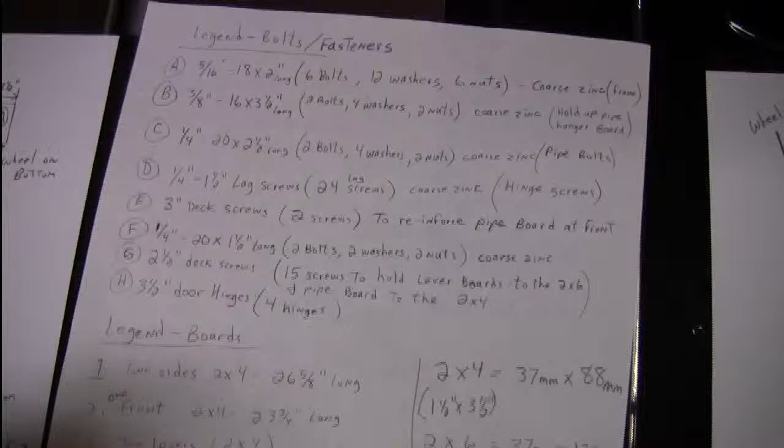I covered all these diagrams a little bit in the last video, but basically this is the side diagram. Here are the bolts, and I believe that's visible for the bolts. You can pause this or the other video if you want to look back.

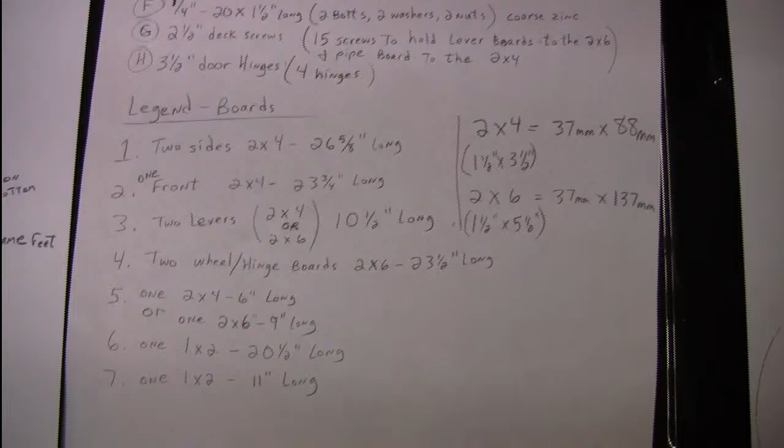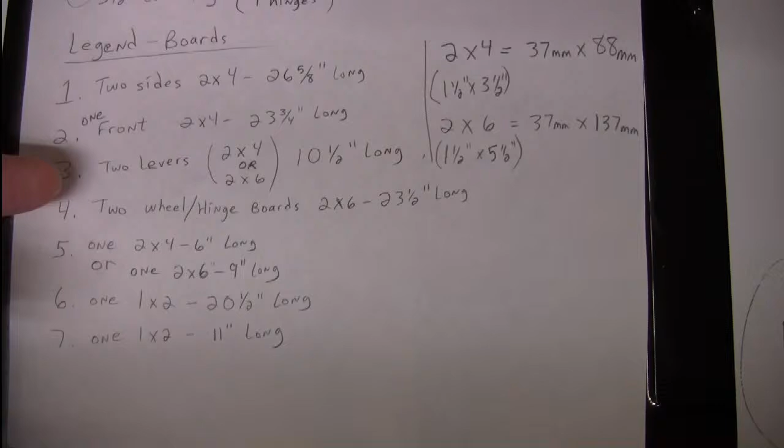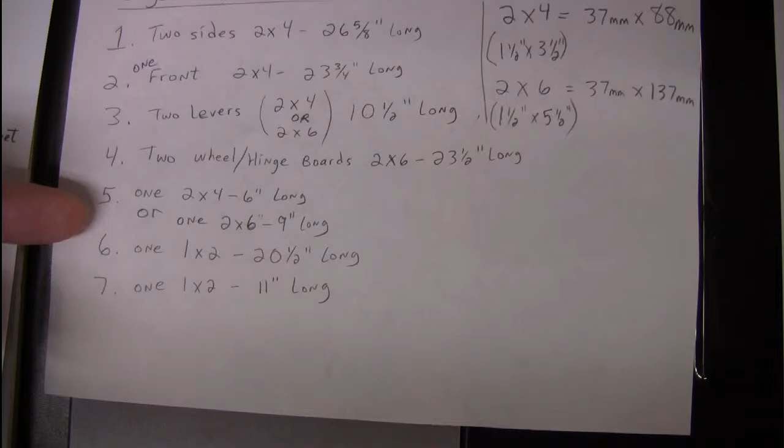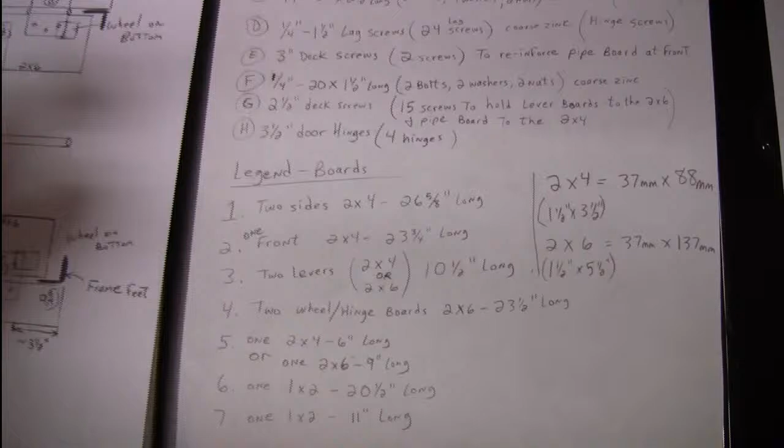So we have the two side pieces, the front piece, the two levers, again 2x4 or 2x6, the two hinge boards used for the wheels, and number 5 is the front piece where the pipe goes through. 6 is a piece of hardwood that goes across the entire center line to hold the back of the pipe, and 7 is the piece of board on top that the ropes are connected to that pulls down.

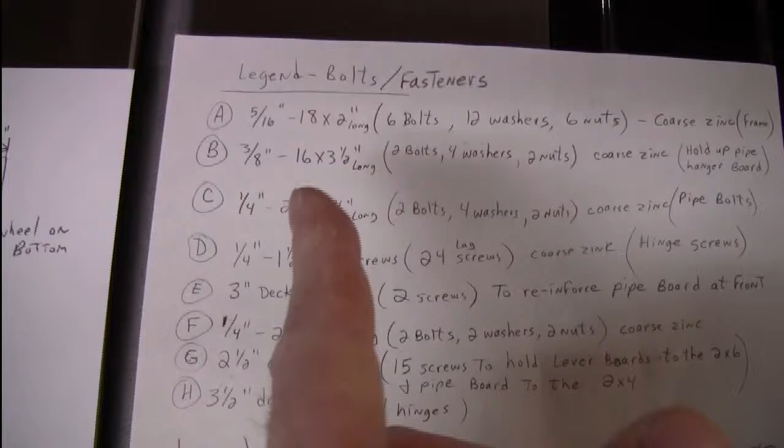So what I tried to do was, I probably should have explained this in the other video, but maybe I'll do this one first, I'm not sure. So this will be one of the two videos.

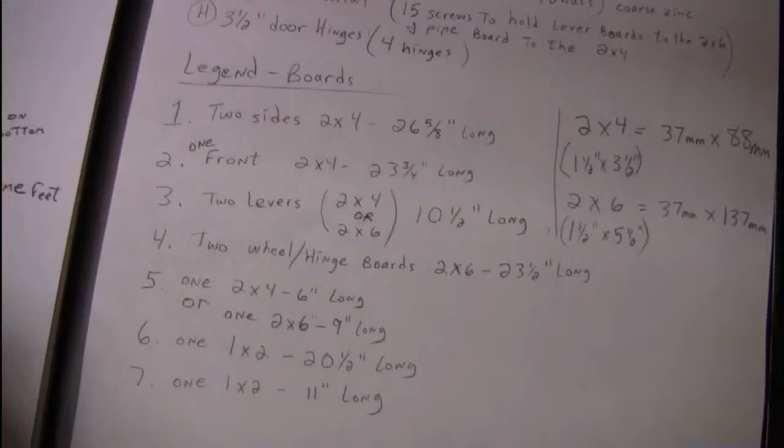I've tried to label these with letters for which bolts were used, and tried to number them for where the boards go. For the side pieces, you can see an A near the hole that would go through the frame. D would be either the lag screws or lag bolts of some sort.

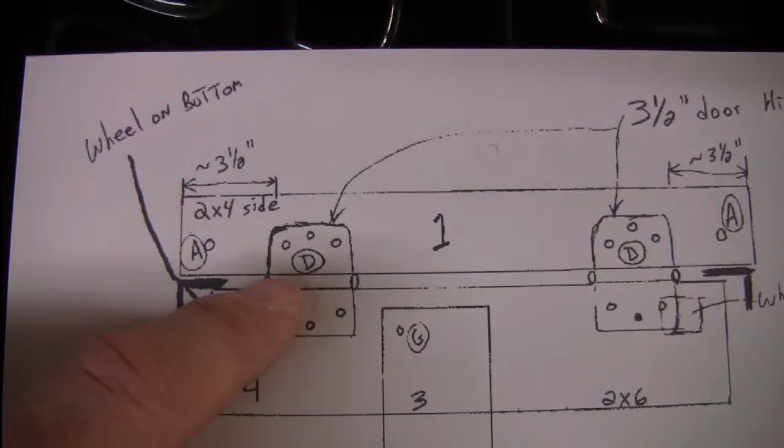It's around 3.5 inches from the end of the 2x4 where the hinge starts, and these are 3.5-inch hinges, and then again on that side.

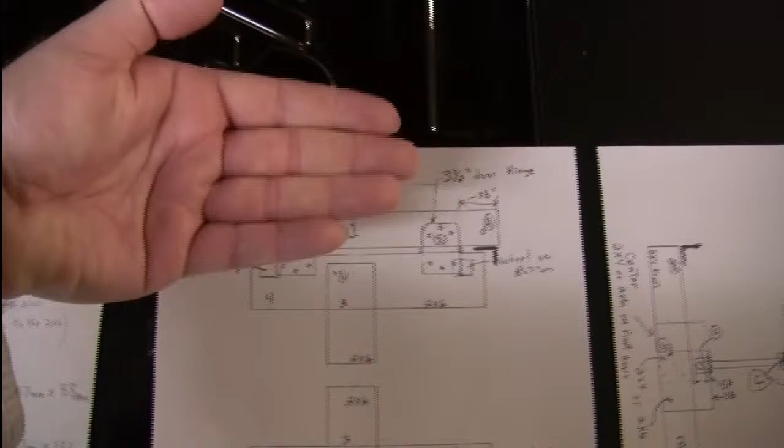So this would be more of a top-down view if you folded the side 2x4 out flat. This is how it would work.

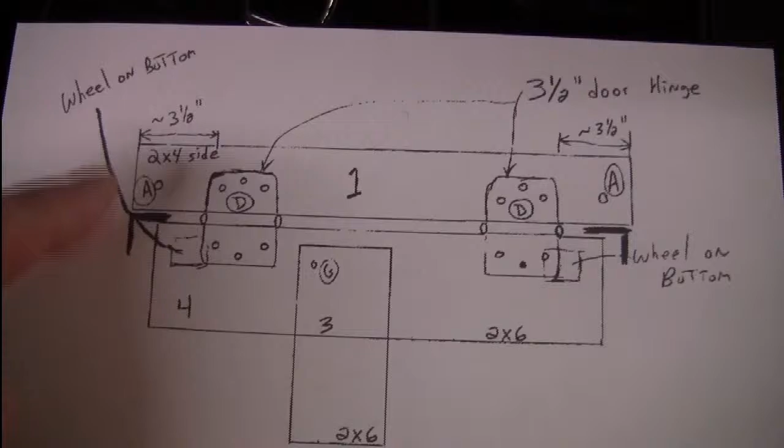What I would recommend is setting up, after you cut the pieces, set it up like this, and with the hinges, there's the barrel of the hinge. That's the spacing you want. So the hinge barrel, if I remember, is right off the edge of the 2x6 wheel piece, and if I remember correctly, yes.

No, I remembered incorrectly. So the hinge is actually up slightly from the bottom, meaning the barrel of the hinge is on the side of the 2x4.

So again, I had listed in the diagram the distance between, for this centerpiece of where it attaches. You just center that against the sideboard when it's all laid out, and that's where you would attach it there. Does it matter? No, you could move it back and forth either direction.

The benefit of having the hinges out to the side as far as you can is that the weight on the wheels, which again is out as far as you can get them, goes more directly from the wheel to the hinge to the sideboard. If you have it in further, there's just more torque and more sideways twist because of where the attachment point is. It really doesn't matter a whole lot as long as you have enough space to attach the hinge to both pieces. You're probably good.

The other piece that's important is because there's a lot of stress on this board, I would recommend a piece of solid hardwood, not something soft, because it will end up pulling through a soft board. And you really don't want that when you have your saw up or something heavy.

Disengaged means the unit is completely down on its frame, not on wheels. This one doesn't have wheels, just a 2x6 frame that it sits on. So when that's completely disengaged and the frame is down solid, the bar is off to the right, flat. Then I rotate 180 degrees and it comes the whole way over to this side when the wheels are fully engaged, and then again it latches.

So for that distance, I had to set up the centerpiece such that the circumference matched the vertical distance of travel needed, and the total circumference travel required was the full 180 degree turn.

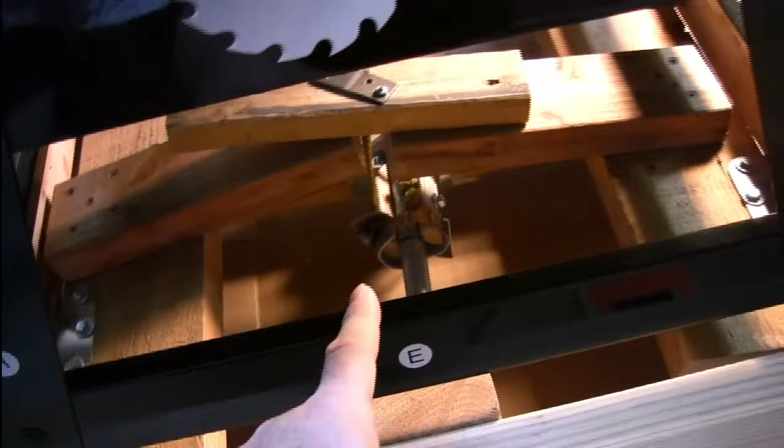On this unit, because I have a wider center section that goes from right here where it's mostly disengaged, again, when I finally get it to the right place where I'm going to actually use the saw, I'm going to tune the level of the feet to make sure they are the correct height. Right now they're just at some random height.

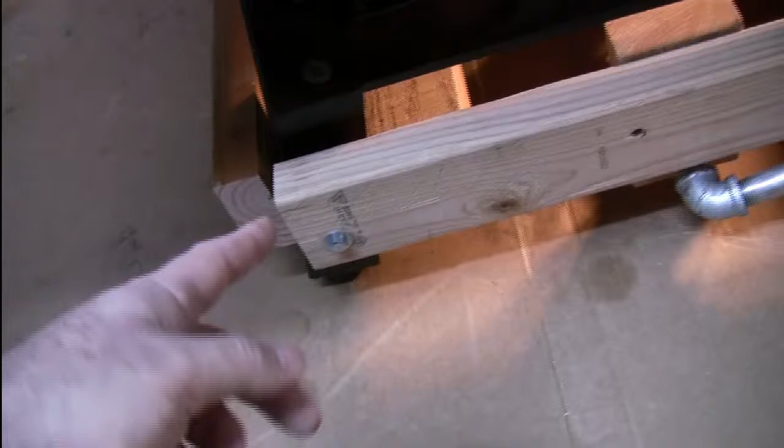Oh, another thing before I forget, the benefit of using 2x4s on these sides versus 2x6s, which go down further, is you can actually get in there with the wrenches that they recommend on the SawStop instructions to adjust the feet. That's important because initially I thought I was going to use custom feet, but then I decided if I just use 2x4s here, I can just use the regular feet on the saw, and that was less work. So that's a benefit of using 2x4 size for these sideboards and front boards, you can still get in there. It's a little more of a pain because you have stuff in the way, but you can still get in there to adjust the actual proper feet.

Yeah, so again, the placement of these pinholes - initially I had it such that when it rested down, the pipe was on top of here. Then I realized later that, due to me having to readjust that center section because I did not have this adjusted properly such that it was actually holding the rope, on the bottom side of this, you can see there's that little groove.

That was a piece of bowling alley maple floor, a piece of maple that was in a bowling alley floor. That groove was a glue line. Initially I had that on top. The rope was slipping in the groove and the metal plate was not holding it down.

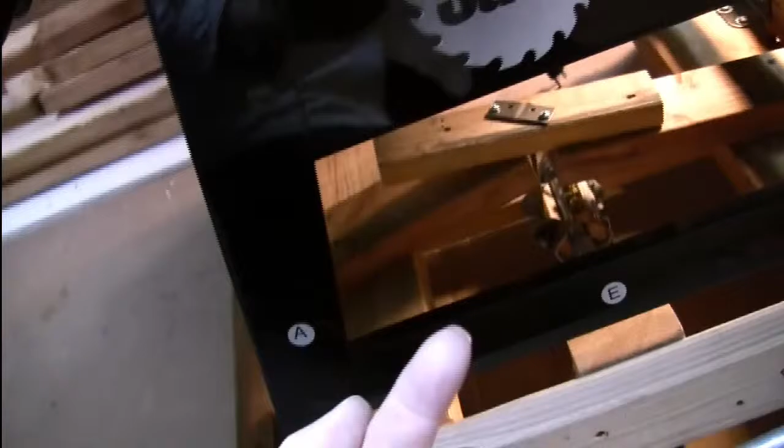So I had to take that all off, flip it over, run the rope up through the pair of holes, over a quarter inch, down through the pair of holes, and then that friction for that up, over, down with that metal plate is enough to hold that solid. Again, you could use a piece of wood screwed down on top. Basically, you just need something that holds down whatever tensioning material you use - rope, wire rope, nylon rope, something like that. You just need to have it so it doesn't slip on either end.

But because I had adjusted that and moved that all around, the vertical distance changed, which means that now the fully down position, this pipe has to go down further. The benefit of having a piece of metal here is I was able to just bend the corner, and now it rests on that little end when it's down.

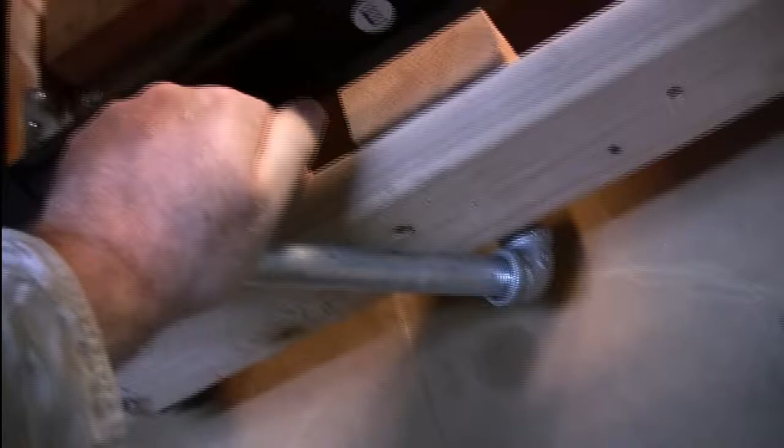So to pull it out, again, this is going to be impossible to do with one hand. It goes clear to right there, and then the wheels are fully mobile on all four wheels. So then that's how I figured out where to drill that hole for the pin.

So yeah, the pin placement is probably one of the last things I would do, because you figure out where on the bottom - and I don't recommend just dropping it like that, but that's the way it goes. The pin placement is the last thing because that's one of the easiest to adjust.

If you decide to have a little something on this bottom area as your stop point, if you want to attach it, I would attach that before putting this front piece on, because it's very hard to get up underneath to attach something otherwise.

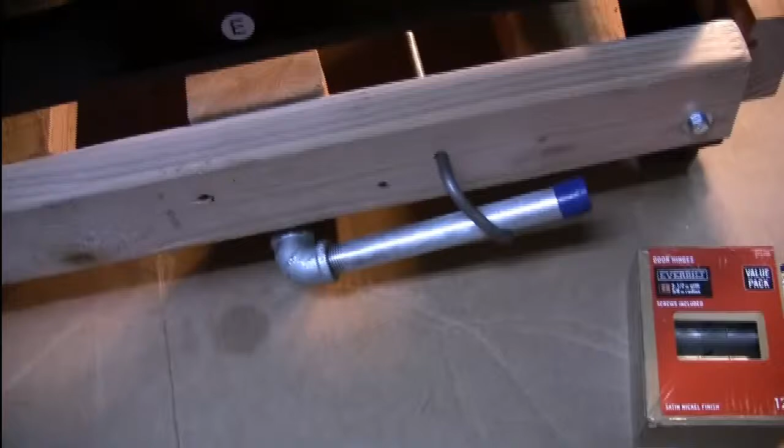With the carving bench it was easier because I hadn't had everything attached yet when I did that part. Let's see what else. Oh, I used blue—these are just water pipe, half-inch inner diameter, galvanized water pipe with an elbow. So this ends up being one full 2-foot section, more or less, cut.

I would recommend a 12-inch section on the front to make it much easier to do attachments and rotations around. Again, you can figure that out. If you use a 12-inch section that is not cut, you will have threads on the ends of each, most likely, or possibly. At least at Home Depot here in California, they sell water pipes in 2-foot sections, 1-foot sections, 8-inch sections—all sorts of different sizes.

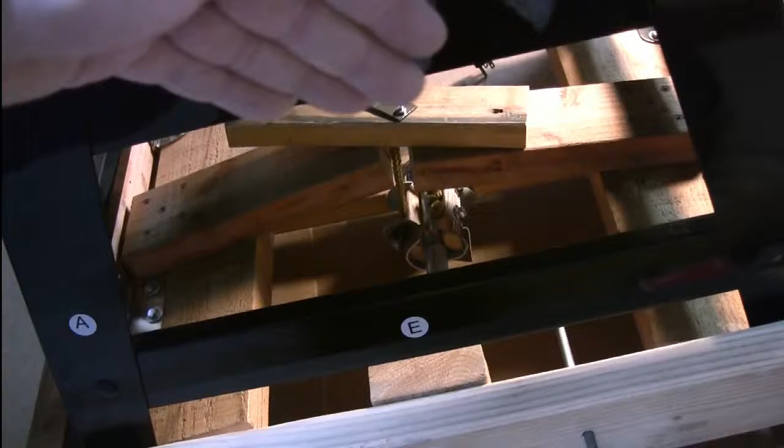If they have the threads on, you can purchase the end caps and screw that on. I didn't—this was a cut section, so I just put one of the pieces of plastic. I carefully removed the piece of plastic that was on the threads originally and stuck it on the end so there's no sharp bits, and that will keep dust out of it. The other side's horizontal and doesn't really matter. If I had a longer pipe, I probably would have just screwed the end cap on, and that would have helped hold it in to keep it from moving back and forth, but I did not have that because I don't have threads on that end either. Again, this was an extra piece of pipe that I had from when I did the carving bench.

So the one thing with the pipe, if you're going to use pipe like this, there's blue Loctite and red Loctite, meaning a compound that you put in pipe threads to keep them from coming loose. Blue Loctite is only pressure releasing. Red Loctite, you need fire to release it, meaning a torch. I don't recommend red, but I did put blue around both of these connections prior to attaching that elbow. I put it in my vise and used a pipe wrench to really crank it solidly attached, and then I used a file to clean off the grooves that the pipe wrench made in the pipe.

You definitely want to do that before setting all this up. Again, you don't want to have to take all this back apart to try and retighten that. And the other thing is, you want that joint 100% locked in so you know the exact angle of this compared to all your bolt holes and other attachments you do.

I did not do that with the carving bench, and it almost messed me up, because then I had everything attached and then realized, hey, why is that slipping? It's like, oh no, the threads are moving. So I had to actually get an entire revolution to tighten it to the appropriate place so that the bar was off to the side like I wanted it.

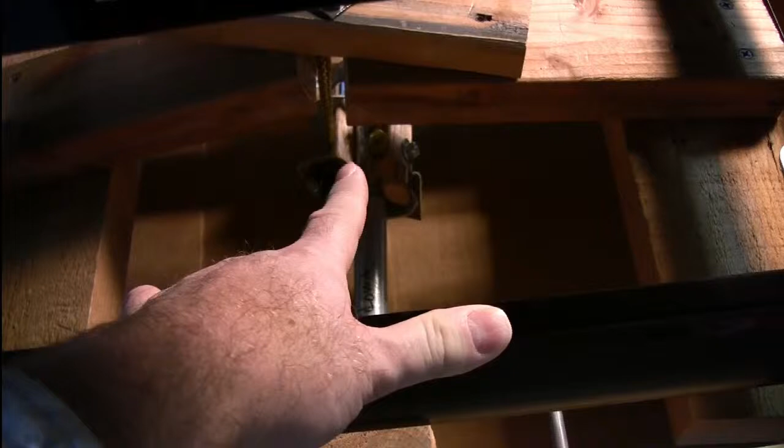Let's see what else. I also—if you're using wood for this center section, use a hardwood. Don't use a softwood for any of that spacing material. The reason I say that is there's a very high amount of torque and pressure when you're cranking down on that rope, and as I said in my first video, that just shredded pieces of pine.

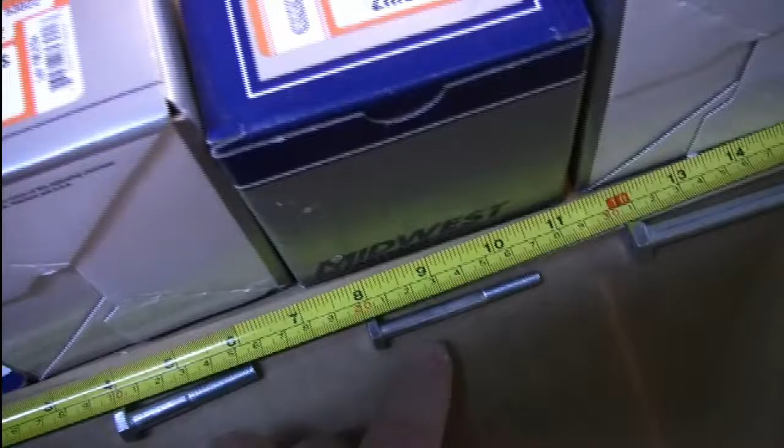I also recommend 1/4-inch bolts or the equivalent metric bolts, like these 1/4-inch ones, because the benefit of this smooth shaft is that way it won't shred the rope at all if you loop it around, but also it's thick enough that the pressure isn't going to cause it to bend or break as it did with the small bolts I initially tried, which I talked about in my initial video.

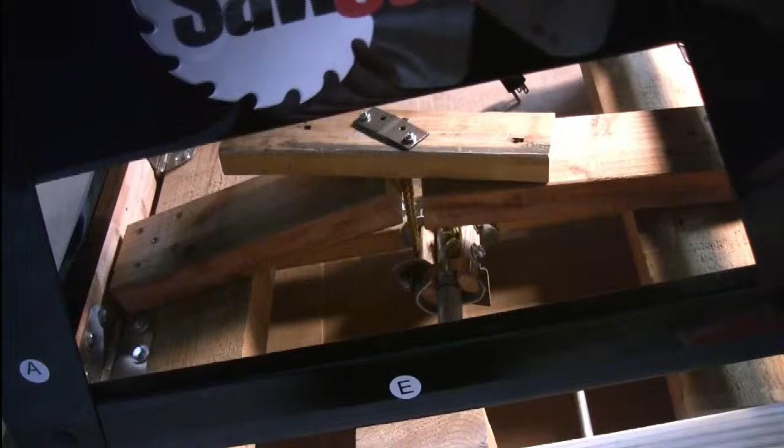Let's see what else. I have the other video which is going to cover a lot of this, but yeah, I think that's everything that I didn't cover in the other video.

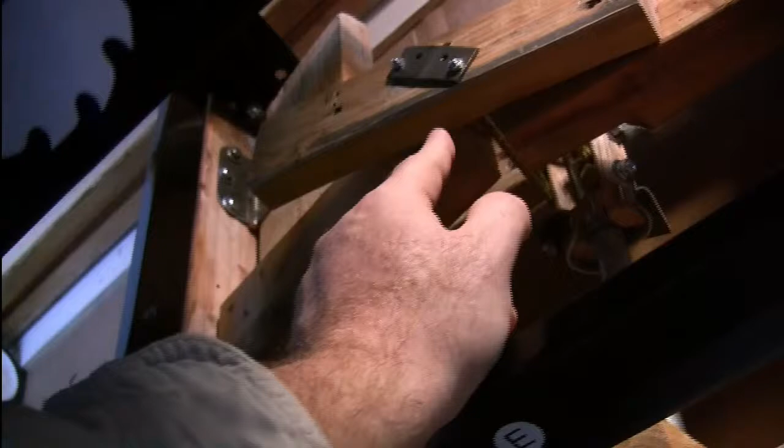Again, the big piece of adjustment on this is the length of the rope and the size of the diameter that this rotates and pulls with. So you don't want—oh, I know another thing—you want to have a nice, solid, smooth surface at this interface. You don't want anything that this board and this board are going to catch on, because that will cause friction and wear out the board. On my carving bench, I actually put a piece of aluminum underneath this plate, such that it was the aluminum rubbing against the wood instead of wood on wood.

Wood on wood, especially if you're adjusting it a lot, will wear out and wear through and cause the distances to change as it wears. So I'm hoping that because this top piece is maple and smooth maple, that's going to wear decently well for all the more I move the saw around on these 2x6s. I may have to eventually put a piece of sheet metal with no sharp edges around that, so it wears a little better.

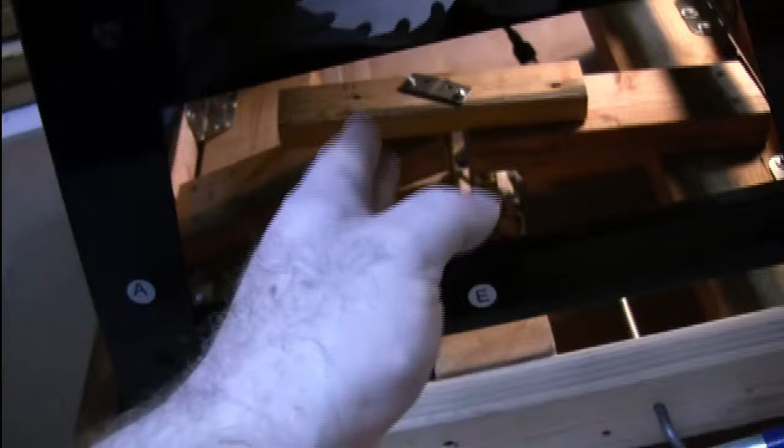You could try that, you could try a bunch of things, but you don't want any rope pieces to catch on any of the wood and wear the rope, because that'll cause the rope to fail. So I would recommend a gap.

I mentioned this in the other video, but I recommend, however you want the rope coming down, that it be vertical from where it's pulling down to the side, versus where it pulls from the center. You can see that it pulls straight down, so the rope is not catching on the 2x4. You definitely want that gap in there.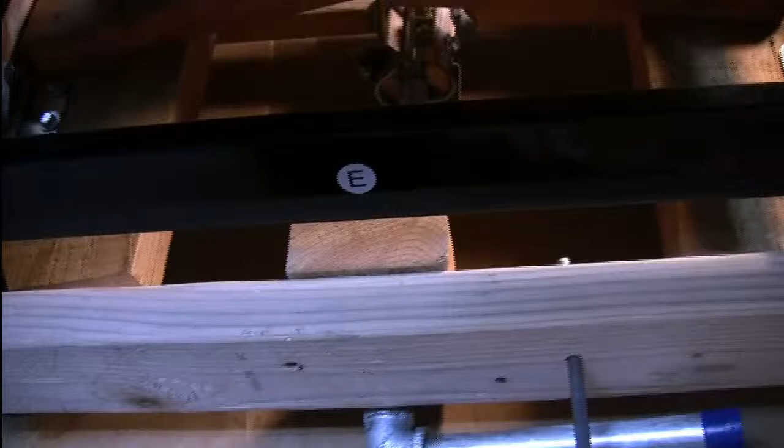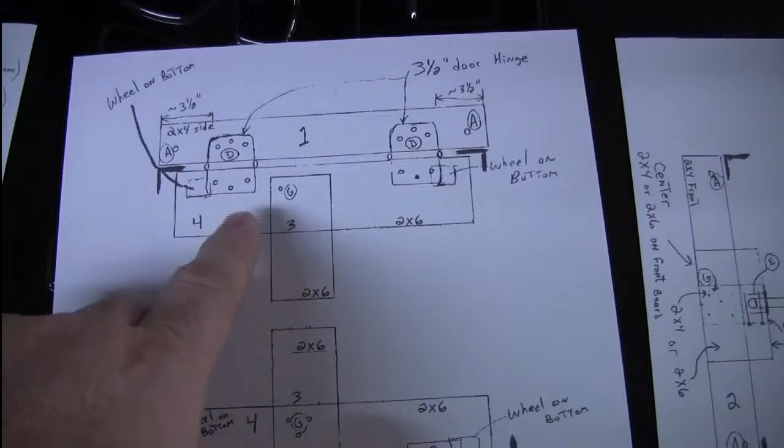What else? I think that's the important piece. So let's go back to the diagram here real quick. The first pieces I would cut are the sides. The second pieces I would cut would be the 2x6 sections. The third piece would be these levers. Again, I would measure, dry fit, and screw, and make sure all that attaches correctly.

Then, leaving the hinges attached to this board, attach the side pieces, and then attach the hinges, put the wheel piece and such inside the saw, attach the hinges to the 2x4s. That'll also...

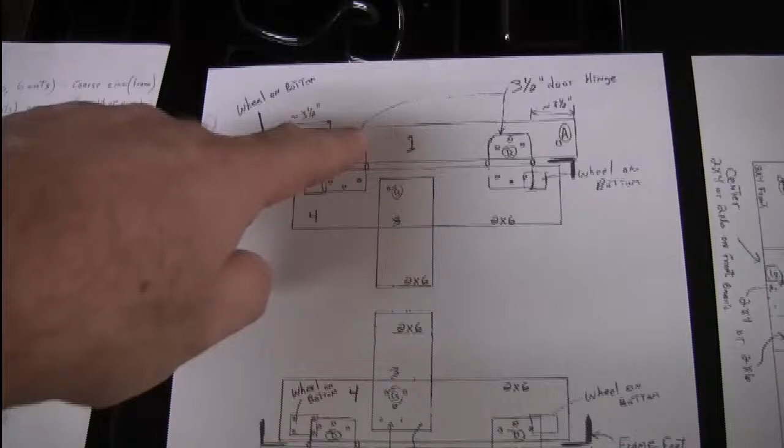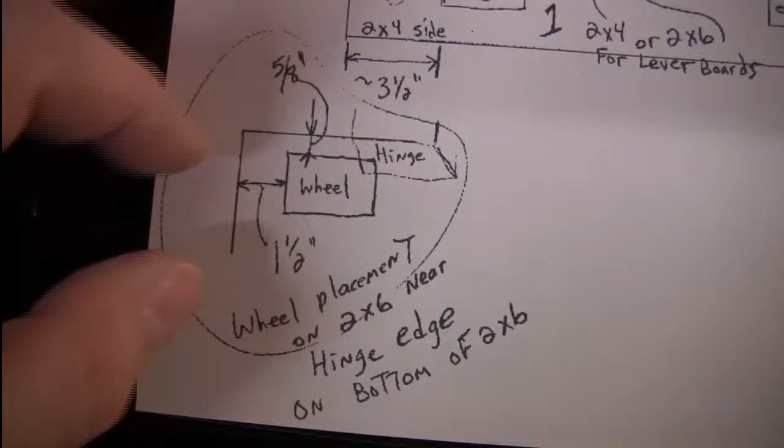Let's see, here we go, wheel diagram. So with the hinges, the wheels that we have here have a longer distance, like a rectangle, for the attachment point. I use that long distance along the 2x6 versus going the other direction. Does that matter? No, you could change that however you want. Depending on where you have the wheel placement, that's going to determine how steep of an angle that 2x6 has to go for the wheel to be fully disengaged, depending on where it is in its rotation.

And I wanted to have a wheel around, but I don't think I have any out, and I'd be digging around. Let me see if I can find one. I found one.

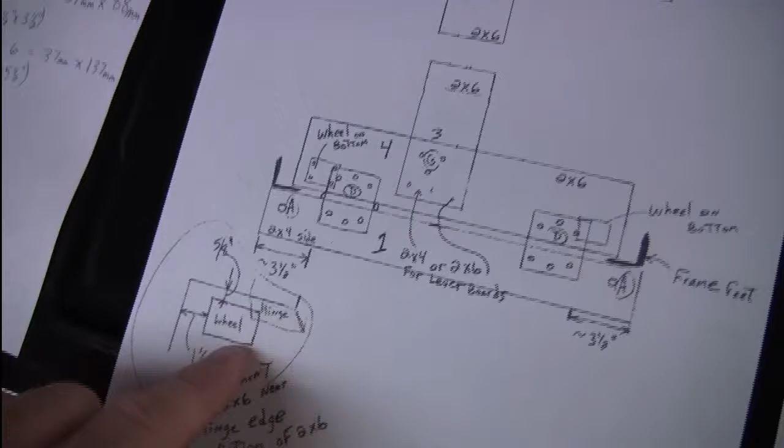So this is not what I used, because you don't necessarily want something that has a brake that could engage where you can't get it. But if you ignore this brake, this would be the wheel placement, like if this is the 2x6 and the hinge is right here, that's how this diagram is. So if this is where that is and this is the 2x6, there would be 5/8 inch here between the edge of the 2x6 and the wheel attachment point, and then it's 1.5 inches this direction.

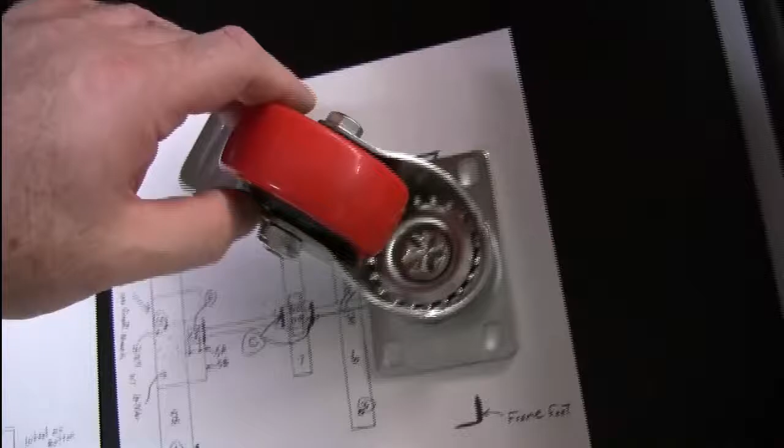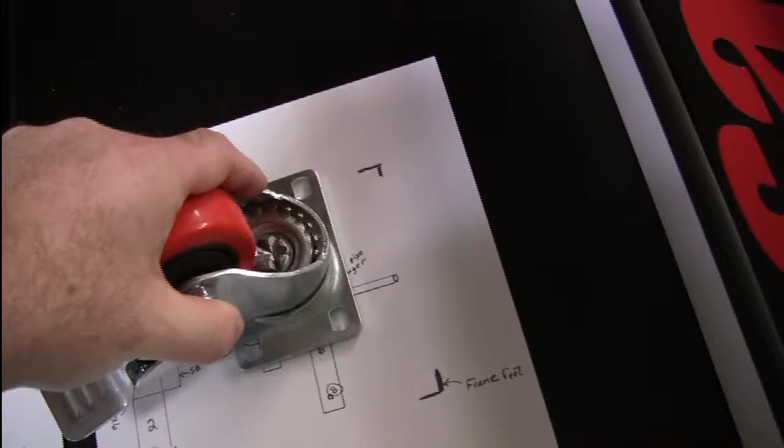And then the other thing you have to make sure, depending on your size of the wheels, you don't want to attach the wheel, like say this is the sideboard, attach it and then realize, oh, I can't rotate that the whole way. So you need to make sure that wherever you attach the wheels, it is far enough to do its complete rotation and not run into the side.

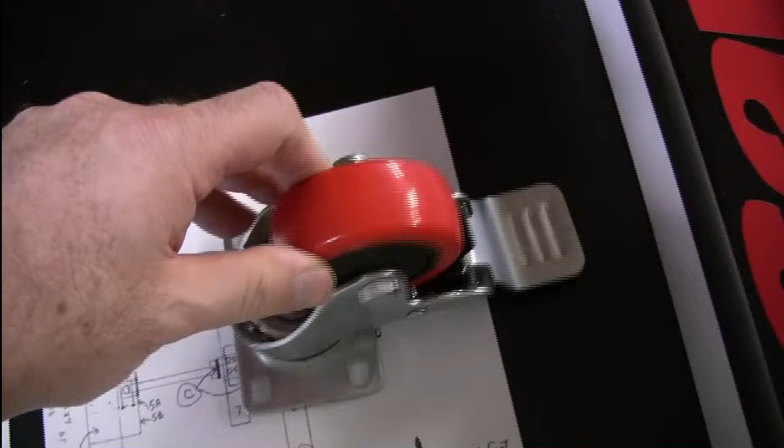That's very important. You will learn the hard way, like I did on 2 projects ago with wheels, that oh, I have to move all those. And then I ended up making the board, because I tried to use just a single piece of 3/4 inch plywood for my 2 projects ago, the dual flip table. I had to drill so many different holes, it's almost like Swiss cheese. It still works, but I really should go in and replace that with a solid piece, because 3/4 inch plywood does great, but not with too many holes.

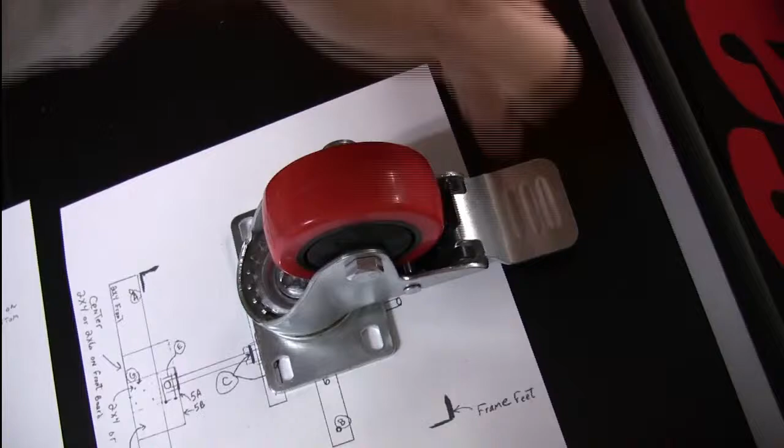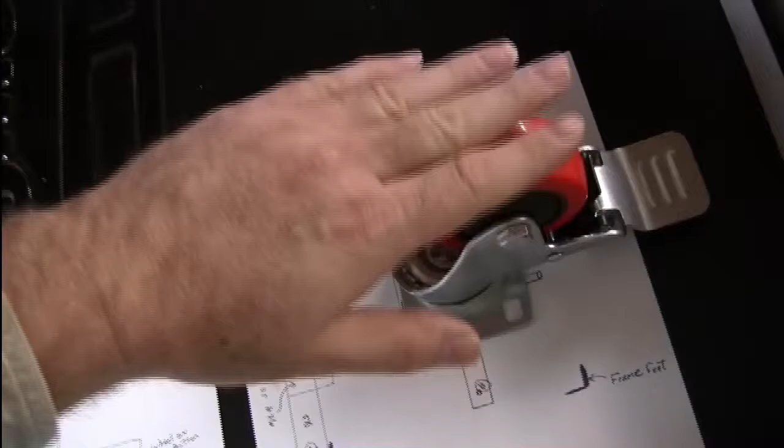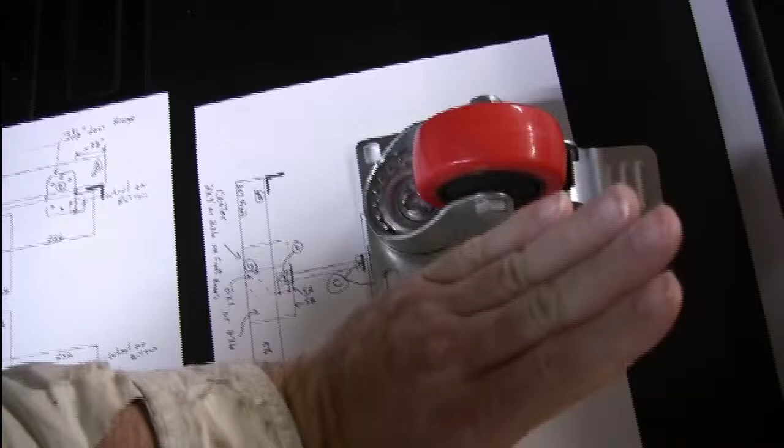So make sure whatever size wheel you use, it will rotate the entire way around without impacting the side of the setup. Again, depending on if it's facing in this orientation, the bottom piece is going to have to tilt much steeper to get this to disengage than it would if it's in this orientation. So don't just test it in this orientation, test it where the wheels are actually back as far as they'll go, and then that'll have to have a much steeper angle. And that just means you're going to have a longer rope to do the attachment. But that should work for there.

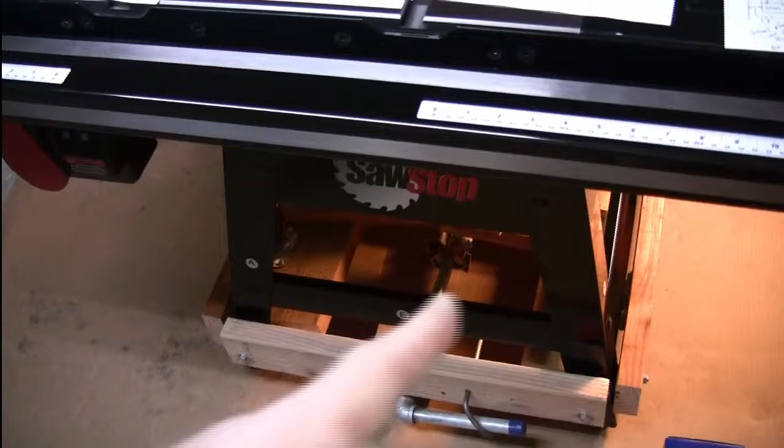I think, other than not knowing what people are going to use for materials, that's a lot of the logic and reasoning and why I did the various pieces and choices that I did. So hopefully that'll make sense to some extent. I realize that yes, this is a crazy diagram, but it works for me. Hopefully it'll work for other people, but it works for me.

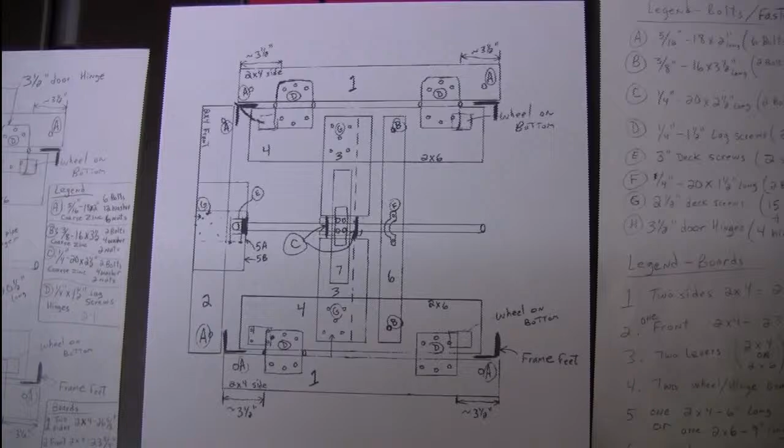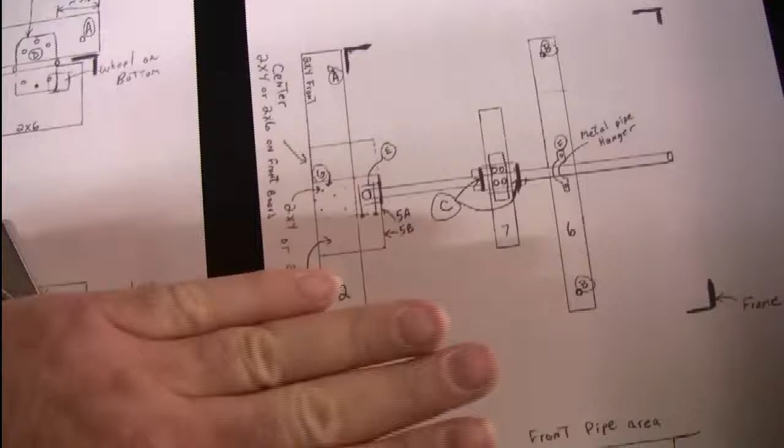So this is the diagram for the side pieces and the levers, and this is the diagram for the front. You can see here the attachment points and the location of the wheel. Again, this is as if it was laid flat - it normally is attached vertically.

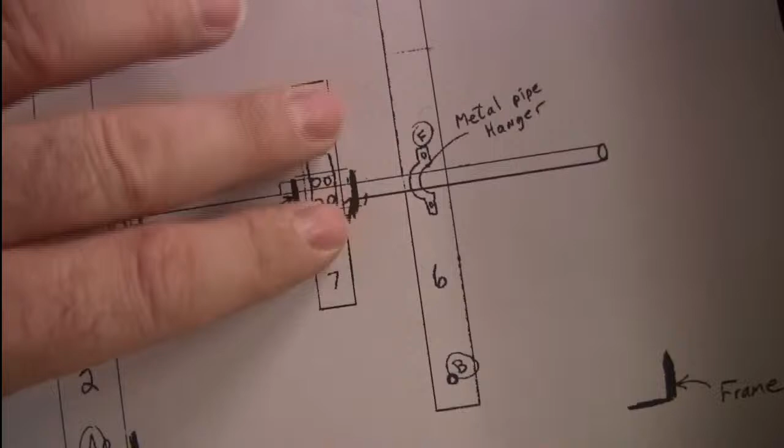So you do the hole for the pipe that comes through. Here you can see there are 4 holes where the 2 sides of the rope come up through that very top board, over and then down. Then you just have something on top of that rope - a screwed down piece of wood or metal - something that doesn't allow the rope to slide back down through.

Here would be the pipe hanger to hold the longer pipe, and notice I drew a proper longer pipe, because I recommend a longer pipe than what I did, which ended right there, because that'll work much easier.

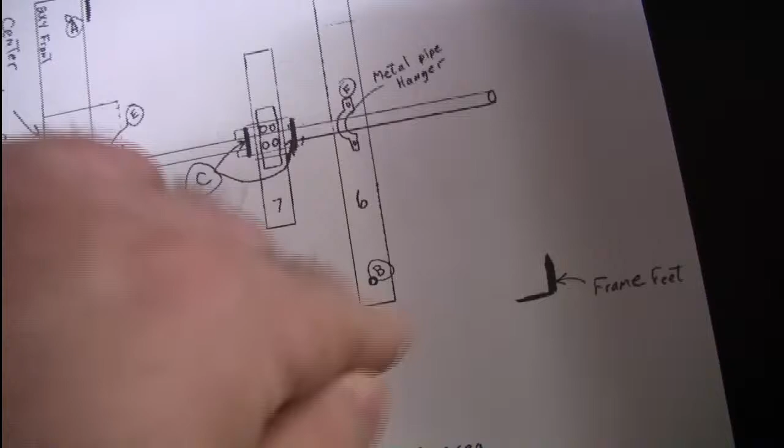With these vertical bolts, you really just need to make sure that depending on the angle of the sideboards, the bolts will still go straight down. So you need a wider hole at the bottom side of the board on the side pieces, such that when the piece is completely tilted up, the bolt will still go down through and attach here.

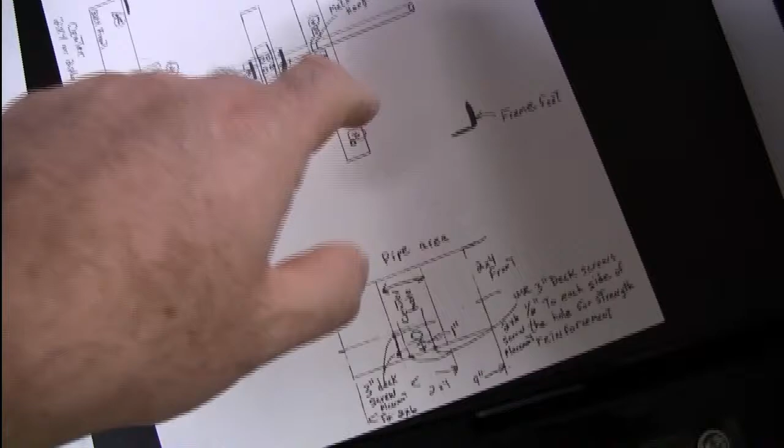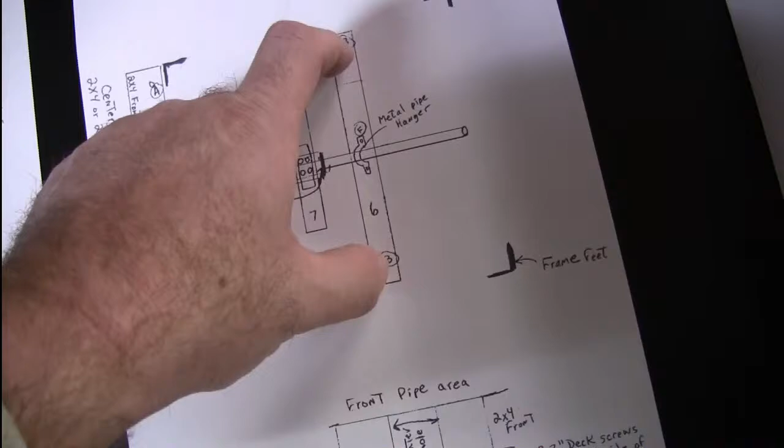Could you use something else? Yeah, probably, but with a longer pipe it's not as big a deal, because this can just float around, or for that matter, as long as this, when you tweak it, holds on. I still would recommend bolts of some sort to hold it there, though. That way it just stays in place, and things that stay in place where they're supposed to be tend to wear less.

So there's the front pipe area again. The screws that I'm talking about for the hole, you can see there - one to each side of the pipe hole. That tends to hold the 2x4 together to resist splitting.

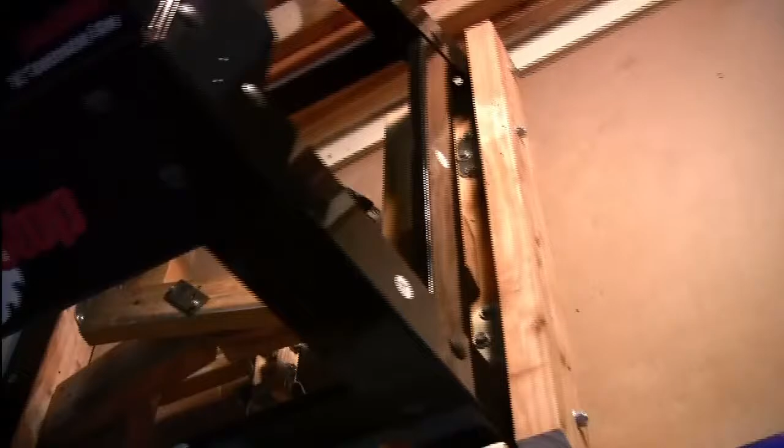What else? I think that's everything. Between the two videos, I'm really hoping that covers all the important pieces. Oh, the other piece - I guess the one last thing is, and I don't know if I can show this without going... yes. So I have Rockler's quick connect 4-inch ports.

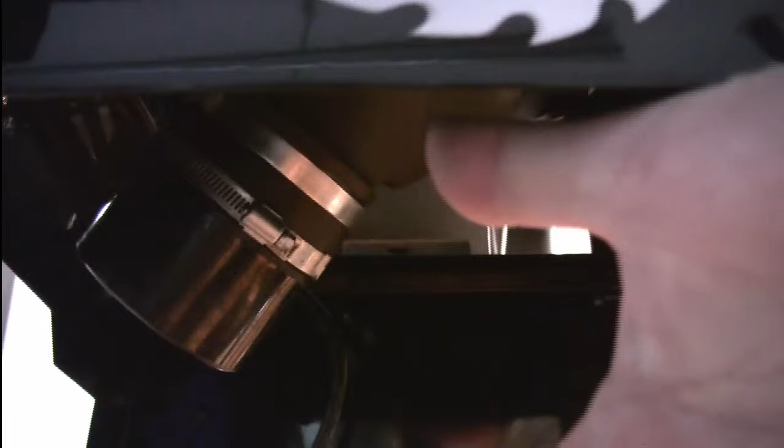Due to this, since I did not purchase the dust collection attachment panel, I have to have a way to connect my dust collector to this unit. So that has the Rockler quick connect attachments. I put one of the 4-inch ones with the rubber side on here and have the dust port right there. Eventually I might get a hose and make a side piece such that it comes down to a piece that attaches down further. But for now, that should work.

But you need to make sure whatever you attach here for the boards does not go up too high that you can't connect your dust collection.

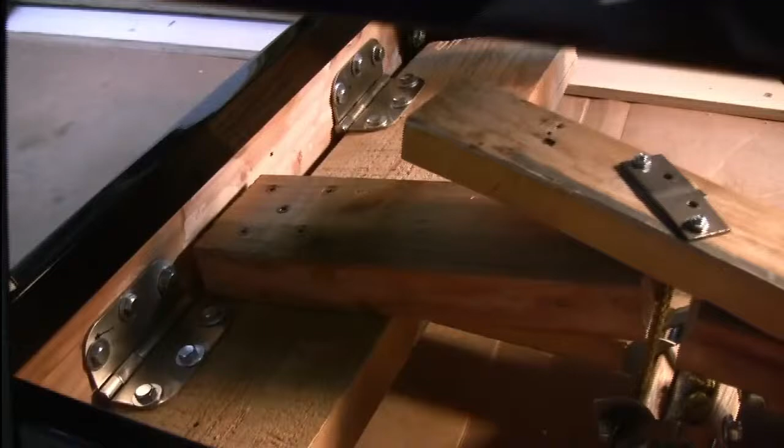The other thing to keep in mind is I would recommend attaching these levers before you attach the 2x6 to the side pieces, because I couldn't get my screwdrivers and such down in there to attach that.

For the other important piece, I recommend washers on the inside between the metal and the bolt head, and everywhere that the washer and nut would contact the wood. So there's even washers on the inside of the hinges so that it didn't dig into the hinges quite as much. But everywhere, like here, there's a washer on the outside, and I have the bolt going in with the end of the bolt on the inside. Then the nut is on the inside with a washer.

So here you can see the nut is on the outside. But I wanted it to not stick out quite as far in the front, so I ran the bolts in. On the sides, I have the bolts coming out, because that didn't matter quite so much.

But yeah, I hope that's everything. If anybody still has additional questions, let me know, and I'll try and do an additional description or write-up. But I'm hoping that covers all the pieces that somebody would need to make something like this. Like I said, I'm happy with it. It's not perfect, but it works.

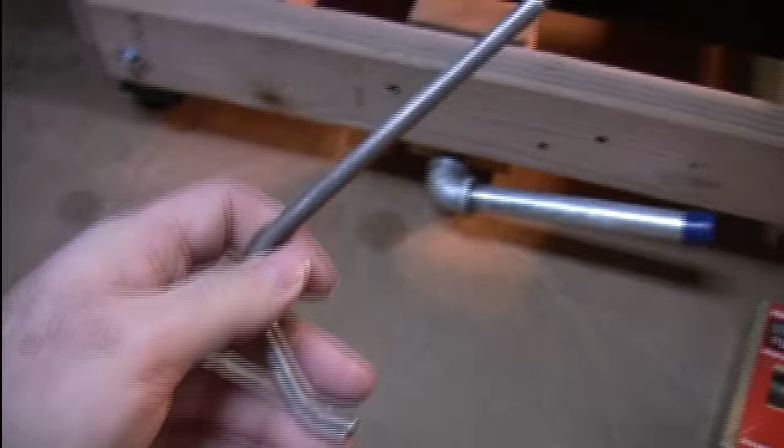It does what I need. With this pipe, I can change how it adjusts, I can bend this piece around. This, I believe, is 5/16 - let's see, yeah, that's 5/16. So this is just a piece of 5/16 threaded rod that I cut with a hacksaw, filed it off smooth, and then bent in my vise to get the right angle for connecting.

You could use something else, but the benefit of that is because I was able to bend it, and this does not push down much, but that holds it. A lot of this thing is up to you, but I'm hoping that was useful. Thanks, let me know if you have any questions.